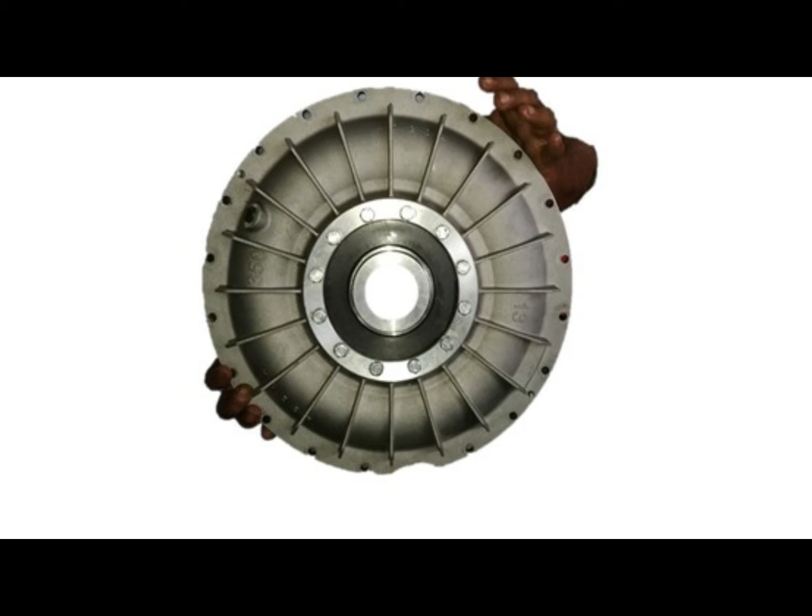My name is Abdul Rahman. I have designed the impeller and worked on the manufacturing process. And I am here to briefly introduce you to our final year project. We have designed and manufactured a torque converter. Our team has collaborated with Collaborative Heavy Industry Limited and GIK to produce the first ever torque converter that is manufactured and designed in Pakistan.

There are different advantages of torque converter. The first advantage of torque converter is fuel efficiency. Second is torque multiplication. Third is reduced wobbling effect. There are three parts of torque converter. First is impeller, second is stator, third is turbine. Impeller is connected to the input shaft. Stator is connected between the input and output, and turbine is connected to the output shaft.

The working of torque converter is simple. Torque converter works on the principle of fluid rotation, that is centrifugal force. When the impeller rotates, it rotates the fluid and fluid enters the turbine and it eventually rotates the turbine.

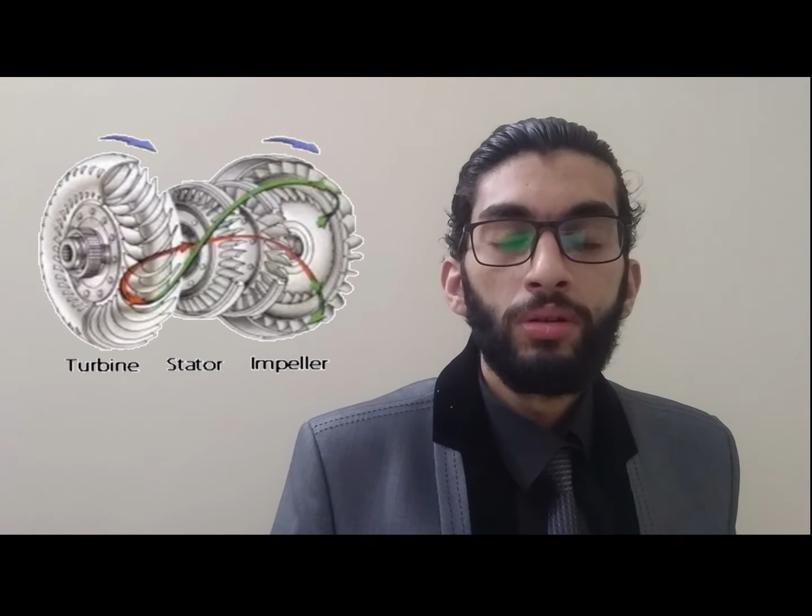Now, there are three phases of torque converter. First phase of torque converter is stall, when the impeller starts to move and turbine is at rest. Second is accelerating, when the impeller is rotating at constant RPM and turbine starts to accelerate. Third is zero torque conversion, when impeller and turbine are rotating at constant RPM.

Steps toward completion. We followed different steps toward completion of our final year project. The first step was to design the individual parts. Now the second step was to combine the parts and make an assembly. The third step was to define input and output for the analysis. And the last was fabrication. For fabrication, we used different techniques, that is die casting, CNC and press. Now further will be explained by Muhammad Ibrahim Khan.

Thank you. Hi, my name is Muhammad Ibrahim Khan and I have been mainly working on the design and analysis part of the torque converter. Let me take you through the intensive design process we followed while designing it. First of all, we defined some important design features such as the inlet and exiting angles of blades, turbine, impeller and stator. To calculate these, we used company requirements and flow equations. Furthermore, we created design equations to get points to create surfaces. These surfaces were then used to create punches and blades out of sheet metal using sheet metal forming processes. After that, these were assembled into their respective base and cores and later assembled to form the complete torque converter.

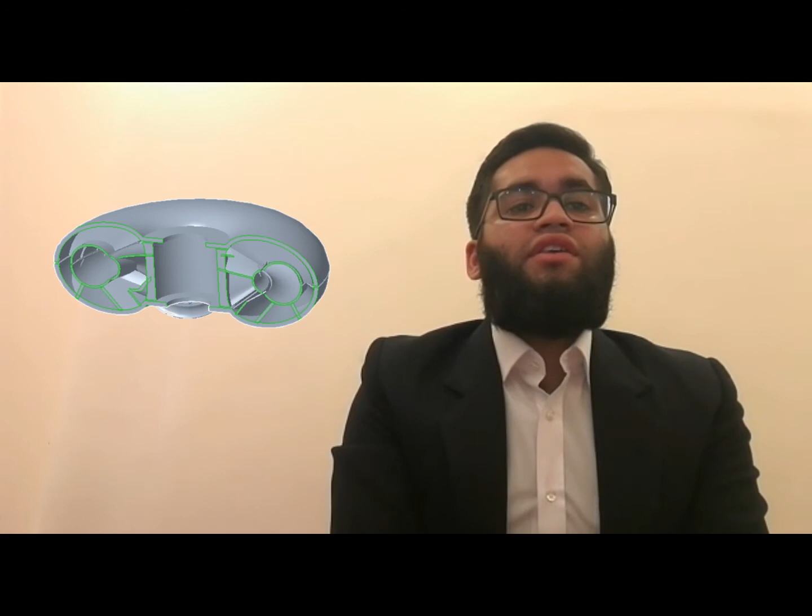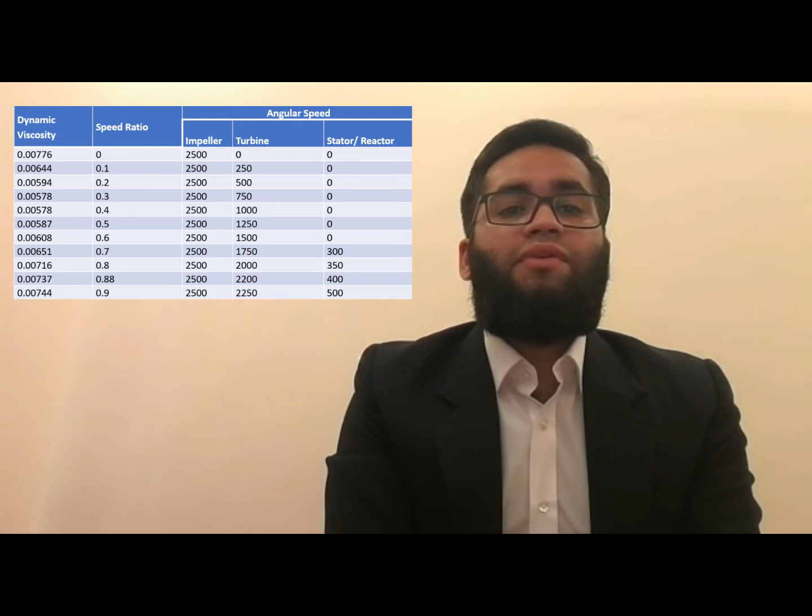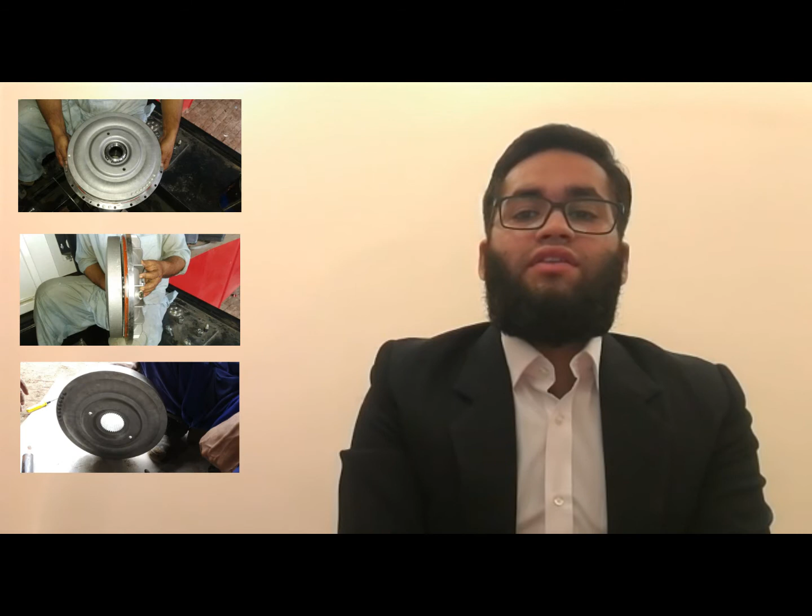Then we used these models to perform CFD analysis. For this, we used multiple mesh types to reach most accurate results. These results will later on be discussed by Mr. Shahab. Moving on, we did analysis on multiple speed ratios to provide us with better understanding of the working. I also oversaw the manufacturing along with other members. We used all available resources in Pakistan industry to provide an initial working component. We currently are working with this company outside the scope of this project to refine this current technology. These are the pictures that were taken while manufacturing this component.

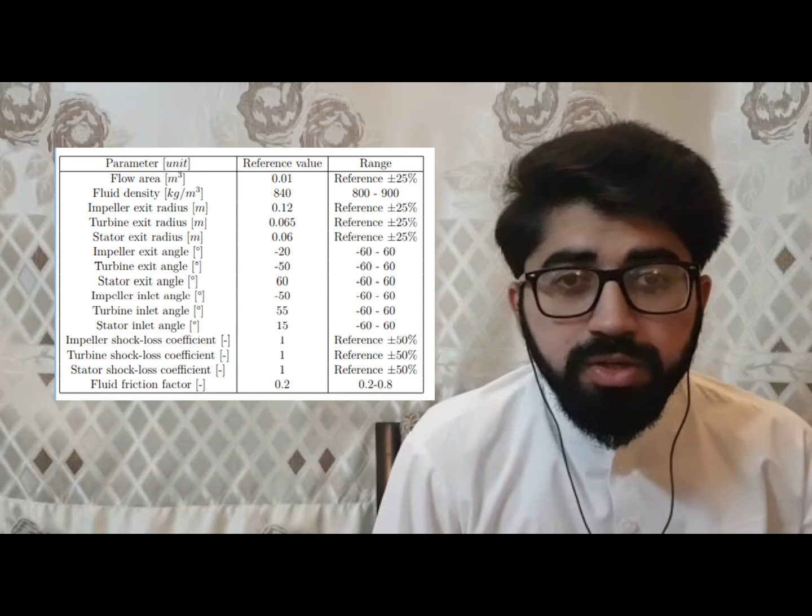Thank you. Now the mathematical modeling of the torque converter. The torque converter has three components: stator, impeller and turbine. Each of these components can be represented using a mathematical model which is non-linear first order differential equations. Besides that, we have the power loss equation which includes all these components. So after putting these input parameters in the above equations, we can see that we are left with 7 unknowns, but we have 4 equations.

So in order to solve this, we know that under the operating principles, the stator operates under two conditions. First, before coupling point, second, after coupling point. Before coupling point, the stator is at rest, so its angular velocity is 0. After coupling point, it rotates freely, so its torque is 0. So we know that before coupling point, when the stator angular velocity is 0, we are left with 6 unknowns. So while putting 2 as an input, we were left with 4 unknowns. So we can find those unknowns using the above equations.

Similarly, after coupling point, when the stator rotates freely, in this case the torque is 0. So when the torque is 0, we are left with 6 unknowns. While putting 2 as an input, we can find the 4 unknowns using above mentioned equations. So by solving all these equations for different input parameters, we can derive different relationships and we can see the trends in the graph as shown here.

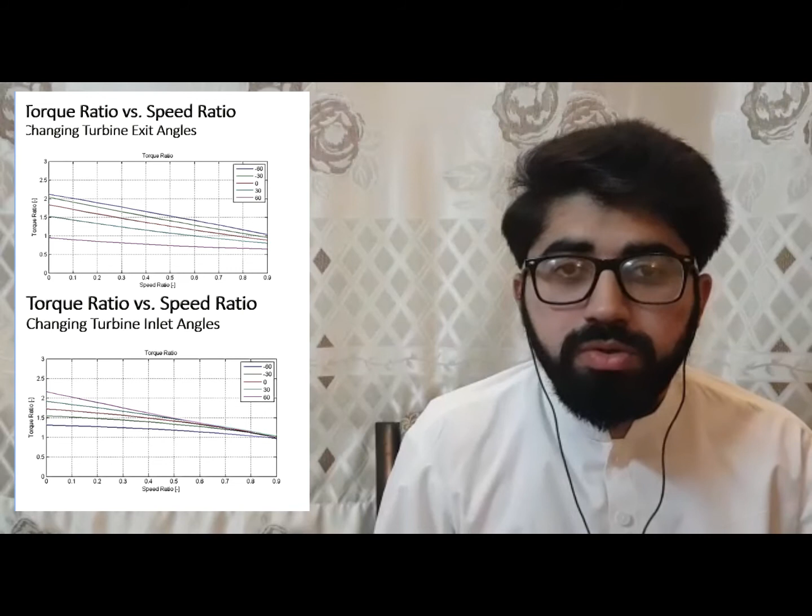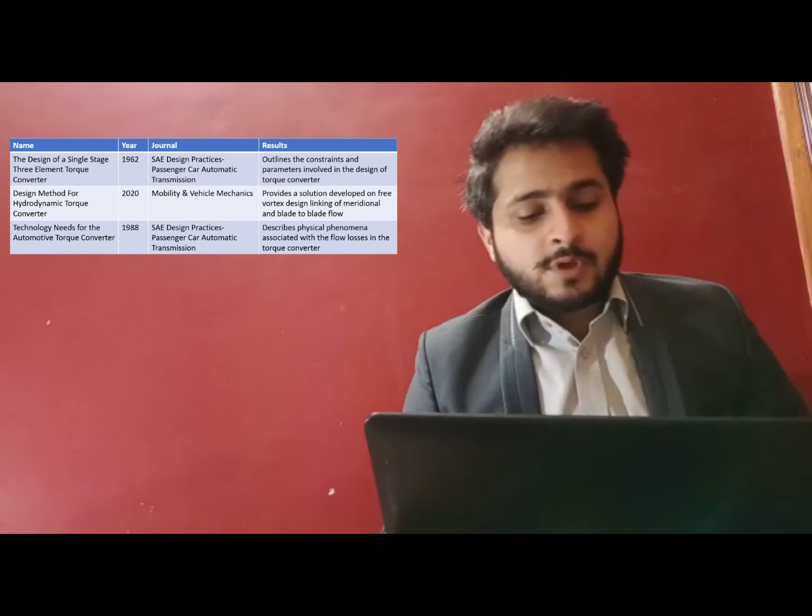Thank you. Assalamu alaikum. My name is Mir Mohammed Zaid and I worked on the design of stator, literature review, and the FE analysis of torque converter. For this project, we basically studied 4 different types of literature that were for design, analysis, cavitation, and for the cooling system of torque converter. For design of torque converter, we studied the design of single stage 3 element torque converter, design method for hydrodynamic torque converter, technology needs for the automotive torque converter.

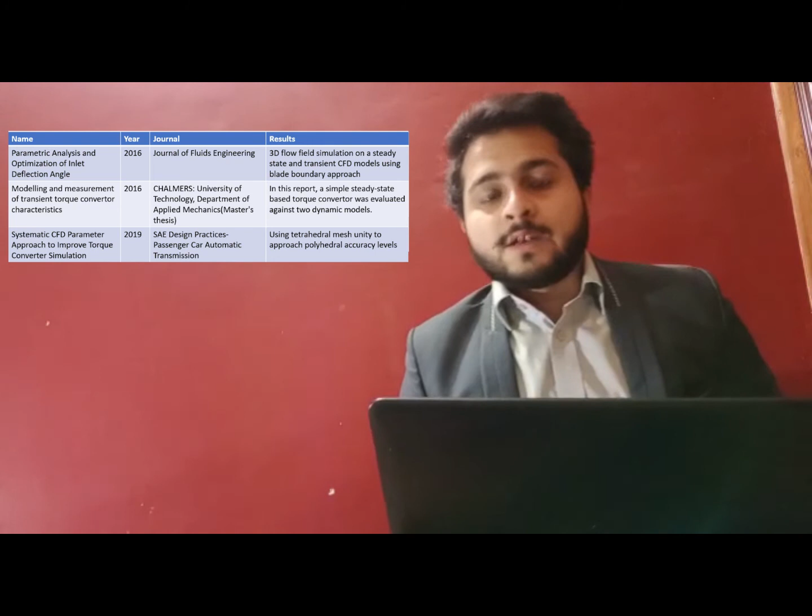For analysis of torque converter, we studied parametric analysis and optimization of inlet deflection angle, modeling and measurement of transient torque converter characteristics, systematic CFD parameter approach to improve torque converter simulation. For reducing the cavitation phenomena in torque converter, we studied static pressure measurement and cavitation signature on the nose of the torque converter stator blade, torque converter capacity improvement through cavitation control by design.

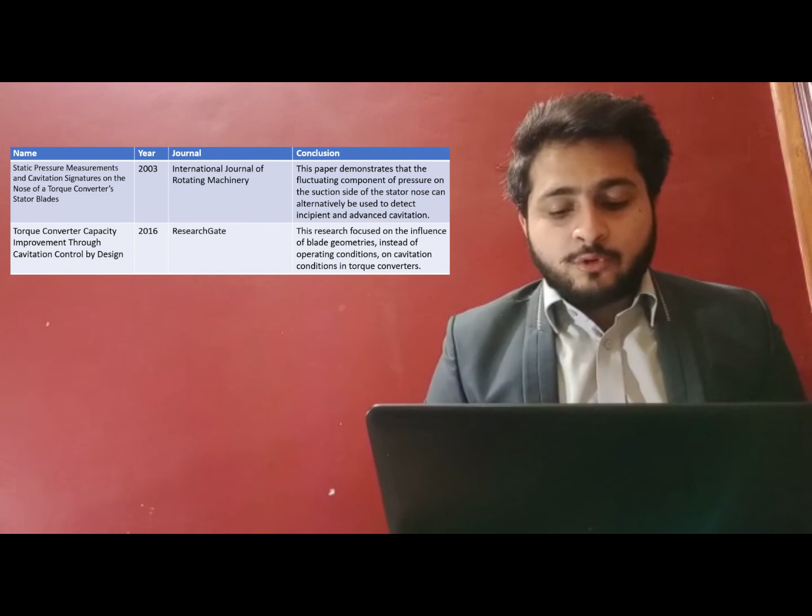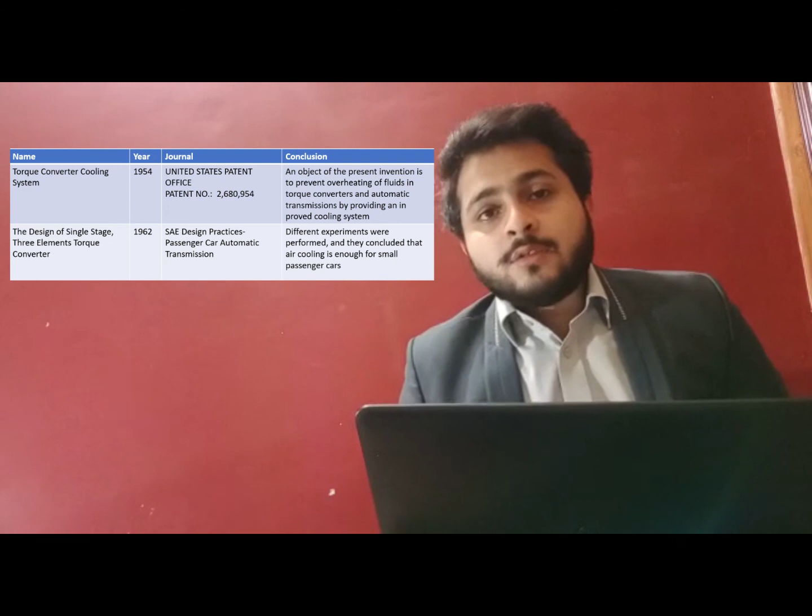As torque converter is a turbo machinery, a cooling system was required for it to work effectively and efficiently. For that, we studied torque converter cooling system and the design of single stage 3 element torque converter.